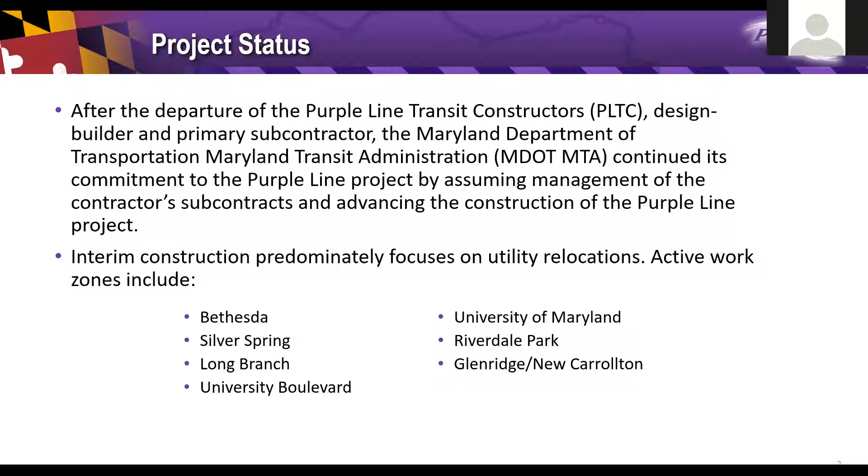We have active work zones in Bethesda, Silver Spring, Long Branch, University Boulevard, University of Maryland, Riverdale Park, and Glenridge, New Carrollton. Next slide, please.

Now let's get into a little more detail on the Lyttonsville area. Utility relocations have been the primary focus in Lyttonsville. Work still to occur includes the overhead power relocation on Talbot Avenue, and the sewer relocation at the end of Kansas Avenue. Both the Lyttonsville and Talbot Avenue bridges remain a priority, but they'll be finished by the new design build contractor once they're brought on board.

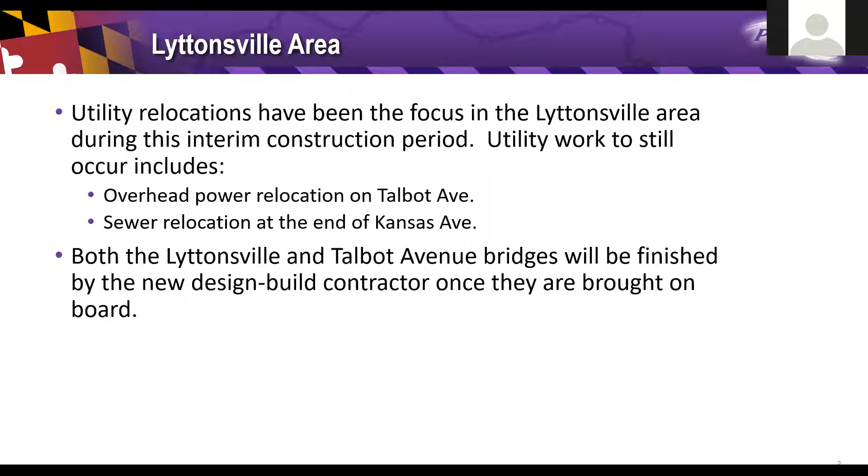So again, we're continuing work until that contractor comes on board, then major construction work such as these bridges will be completed by that incoming design builder. Next slide, please.

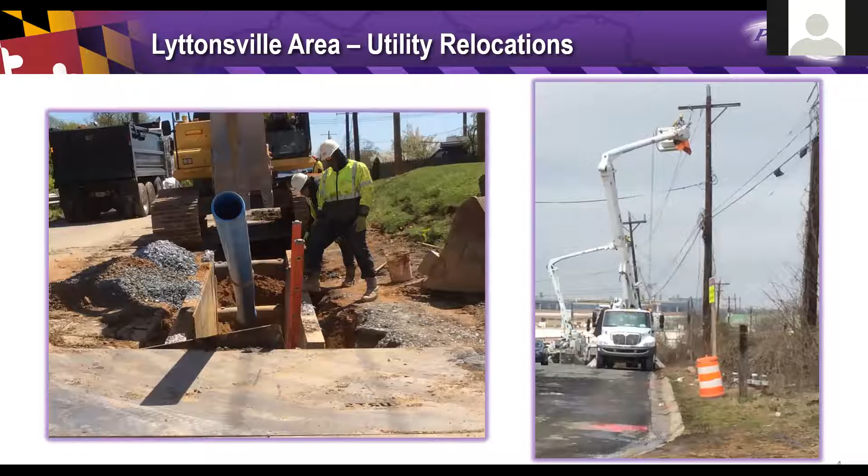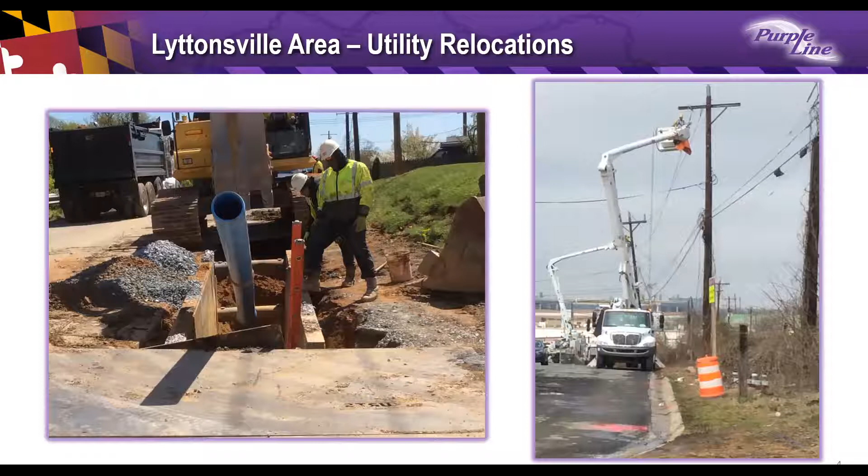Here we see some photos of actual construction work. Amazingly, as you travel the alignment today, there are about 25 crews across the alignment actively engaged in construction. So don't for a moment think the Purple Line has paused. Construction is in full swing under our management again. These photos show work we're doing in Lyttonsville.

On the left, we see supported excavation to support the installation of a new water line going in. On the right, overhead utility relocations. Often you see a whole array of boom trucks coordinating the work together to move the utility lines, because we install new poles and then transfer lines from the existing poles to the new poles, working from the top down. There's a certain order to things, and it's an amazing orchestration of activity that they do.

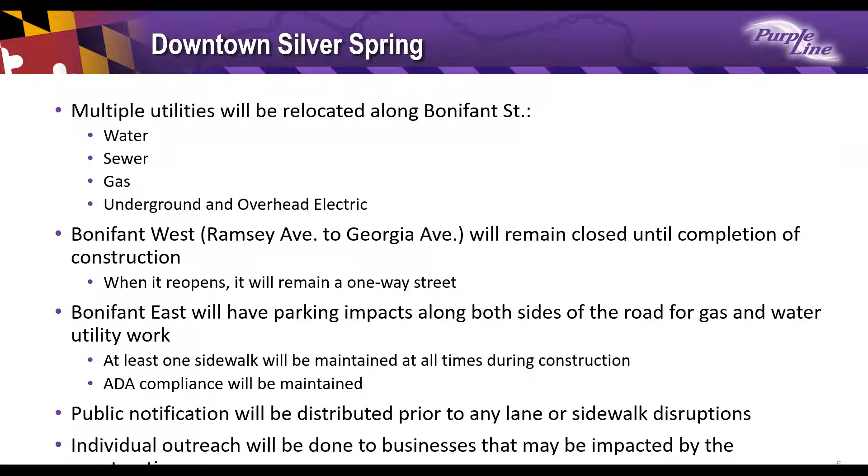On Bonifant West, sewer relocation work is going to resume. There's been a little delay on that; it's not going to happen now. It's going to happen around April 1st, under the parking garage. That's going to last for 4 months. During this time, the parking garage will remain open, but only accessible via Dixon Avenue.

Verizon relocations have started at Georgia Avenue and Bonifant Street and will continue to move west towards Ramsey Avenue. The photo on the right shows the work in progress for utility relocations in the area. Next slide, please.

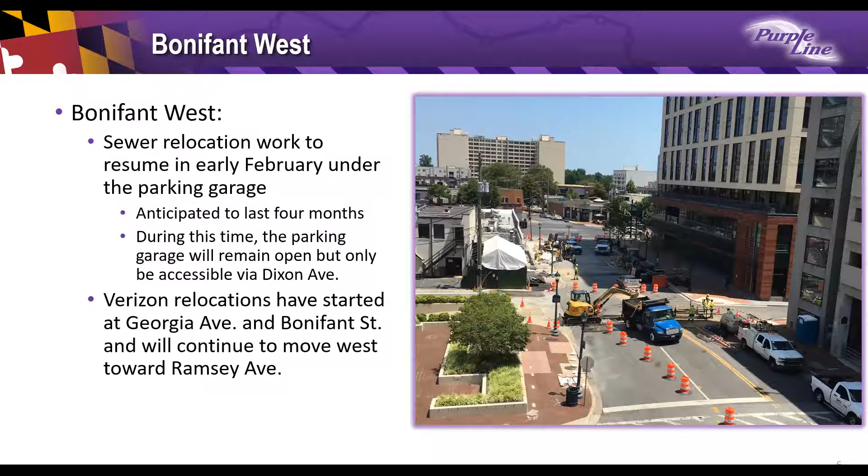On Bonifant East, test pitting is taking place to locate underground utilities, and has been ongoing between Georgia Avenue and Fenton Street. Before we do work, we have to make sure we know what's in the ground.

Apologies for those who are very up to speed on these things; I like to give a little background sometimes for everybody's benefit. We do test pitting to explore what's really there, because oftentimes utilities may have been installed decades ago and sometimes aren't captured on as-built drawings. So we need to know what's there before we dig into the ground, because we like to avoid encountering utilities and causing disruptions as much as possible.

Water line relocations have been ongoing since December 21st, and that's anticipated to last about 4 months between Georgia Avenue and Fenton Street.

Utility owners will notify their customers directly should there be any impacts to service. So if your water line, for example, is being relocated and there's going to be a small disruption, the water utility will notify the owner or customer properly.

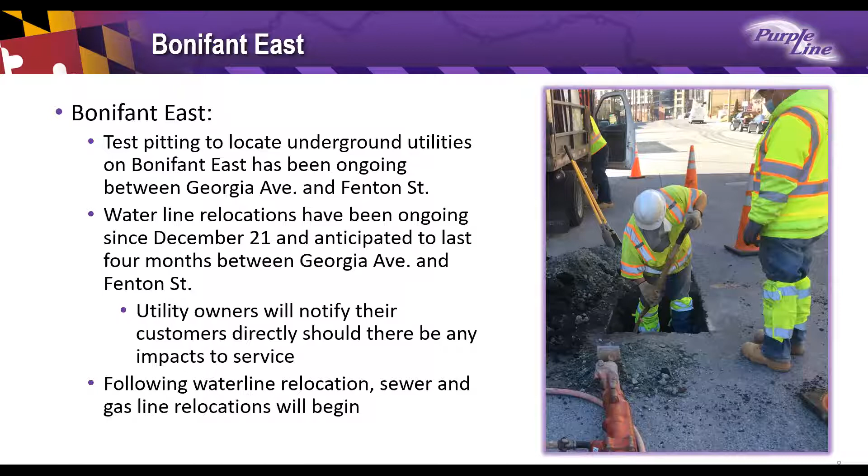Following the water line relocation, sewer and gas line relocations will begin. You'd be amazed — you'd think this is a railroad project, but there's such a large component of the work in utility relocations. It's amazing. Next slide, please.

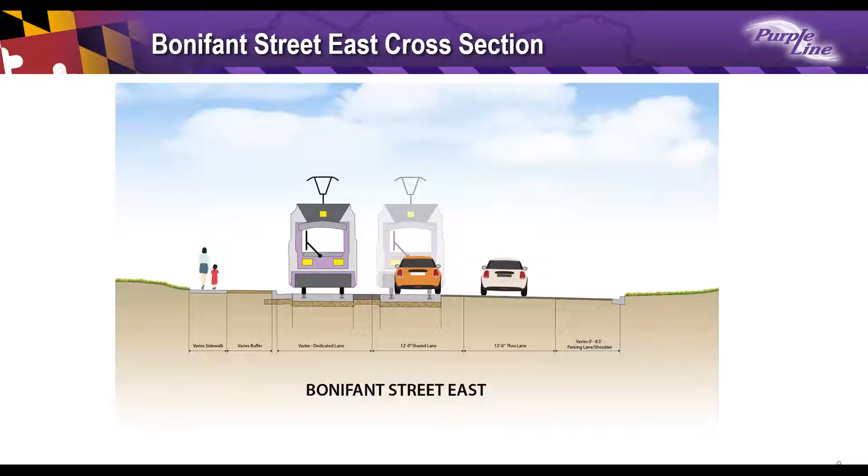Now we see the cross-section depiction of Bonifant Street East in its final arrangement, where the Purple Line again will go alongside traffic and pedestrians. Again, I think it will come out very nicely. Next slide, please.

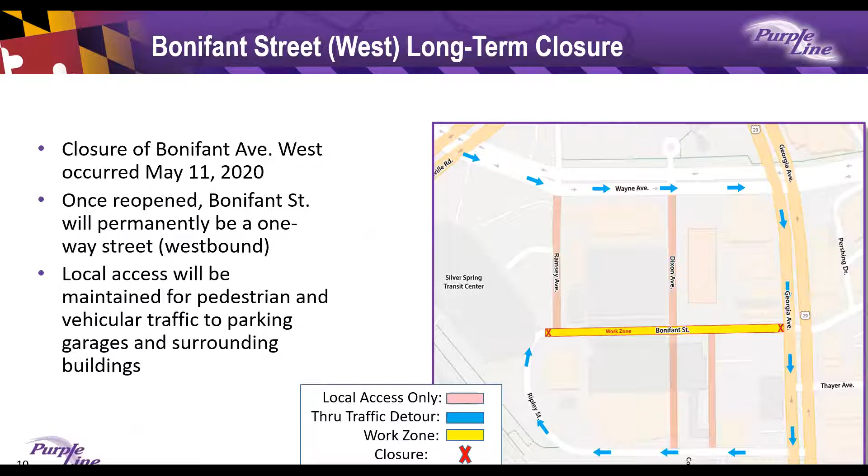For the Bonifant Street West long-term closure update, the closure of Bonifant Avenue West occurred on May 11th of 2020. Once reopened, Bonifant Street will permanently be a one-way westbound street. Local access will be maintained for pedestrian and vehicular traffic to access parking garages and surrounding buildings, as shown in the diagram. Next slide, please.

For Wayne Avenue, utility relocations have been the primary focus. Crews will be relocating water, sewer, Verizon telecommunications, and gas services. Overhead power relocation is 95% complete. Removal of the old poles still needs to occur.

Recall we install new poles, then transfer the existing utilities from the old poles to the new poles, then remove the old poles, because the old poles are right in the way of where we have to build the track. So that works out very nicely when done in order.

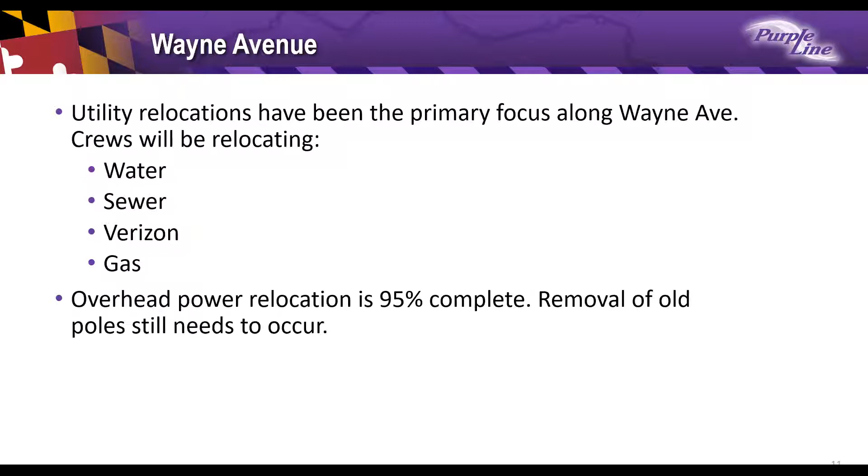You'll notice that whenever we do work, you see all the traffic cones and signage. This is called MOT, maintenance of traffic. In addition to planning the work, we have to have an approved plan showing how we are going to redirect vehicular and pedestrian movements safely through the area. So there's a lot of parts that go into just doing anything in the field.

Rock Creek Park, the CCT, the Capitol Crescent Trail, and the LRV, light rail vehicle - we deal in so many acronyms, it's just endless, but it's good.

The CCT and LRV bridges will continue east over Rock Creek. On the CCT bridge, MDOT MTA is finishing the substructure concrete work - that's like the abutments where the bridges tie into at each end, and certain other portions. For the LRV bridge, girders were set prior to PLTC's departure. Girders again are very huge construction elements that support the structure of the bridge itself.

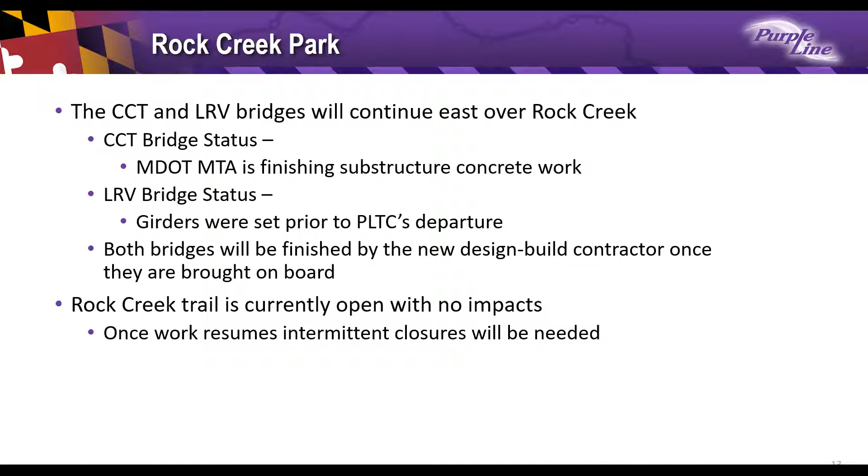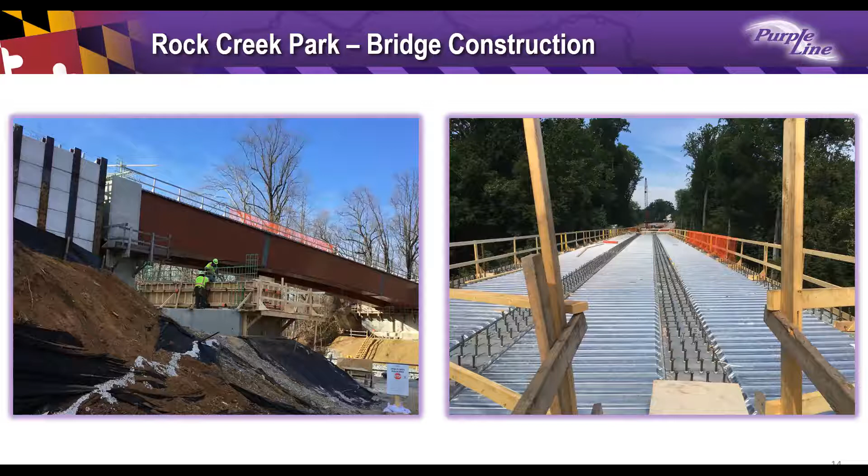Here's some photos showing the Rock Creek Park Bridge construction. The workmen are working on the CCT portion of the construction, and above them you see those huge girders - that's part of the superstructure for the LRV bridge, which you see from a top view, from the deck view on the right side photo. Just some immense construction taking place. It's really exciting to be part of such an operation. It's incredible.

Regarding construction work hours, because we respect our communities, we hold the highest priority to not disturbing the citizens in the areas where we're working. We hope to maintain a minimal footprint, to make the improvements, and to provide the least disruption to the public. We know some disruption has to happen, and we try to issue all the proper notices. I'll talk about our public outreach office later, where folks can communicate their concerns. We want to work with the public and the businesses to address these concerns, and really appreciate everyone's forbearance while we build this system. Construction work hours are typically 7 a.m. to 5 p.m. Monday to Friday, with makeup days on Saturdays as needed.